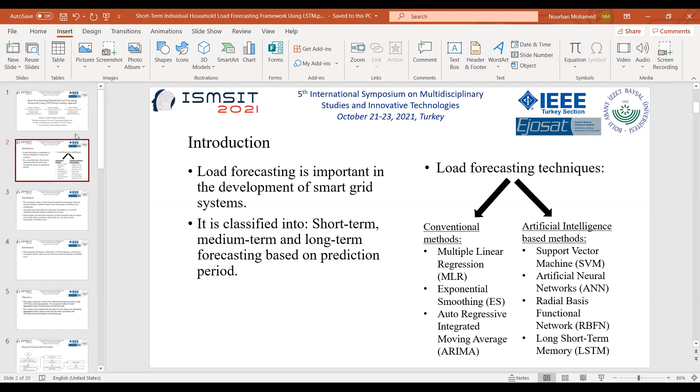Most of the methods mentioned before are used for forecasting aggregated loads at system level, but load forecasting at building level is a challenging point of research, as it requires forecasting unexpected consumption patterns due to the stochastic nature of single household consumption. Accurate load forecasting for individual customers is needed for intelligent demand response methods to be used. And with the development of smart meter technology, large amounts of high-resolution data on energy use at customer level will be available, which will help in more accurate load forecasting at building level.

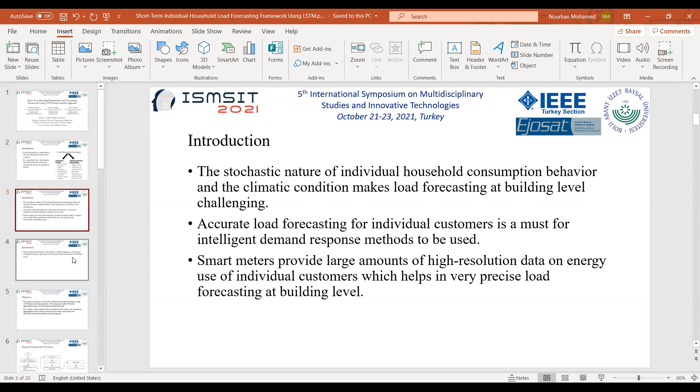Also, deep learning techniques, especially LSTM technique (long short-term memory technique), can produce acceptable results when used in short-term load forecasting at building level. So the objective of this paper is to propose a short-term load forecasting framework using LSTM deep learning approach; the model aims to achieve higher accuracy, and the model can feed both aggregated loads or individual household loads. Our model is then tested using two different time series, one representing the aggregated load at station level, and the other representing the individual household at building level.

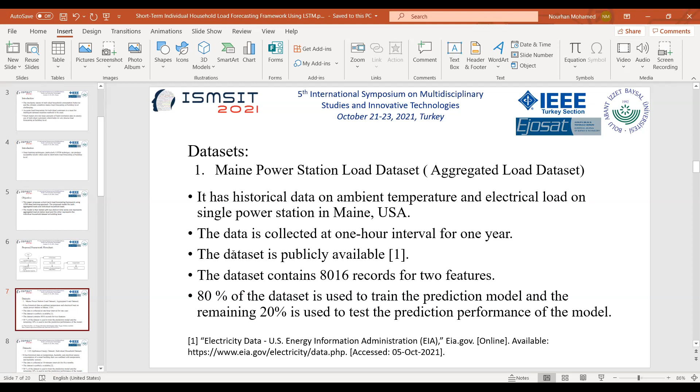The second dataset used is the UCI Appliances Energy Dataset, and it resembles the individual household dataset. The data collection took place in a smart building that was outfitted with temperature and humidity sensors. It has historical data on electrical energy consumption of smart buildings, temperature and humidity inside the building in different places, and temperature and humidity outside the building. The data is collected at 10 minute intervals for 5 months. This dataset has 19,735 records for 26 features. Also, this dataset is publicly available.

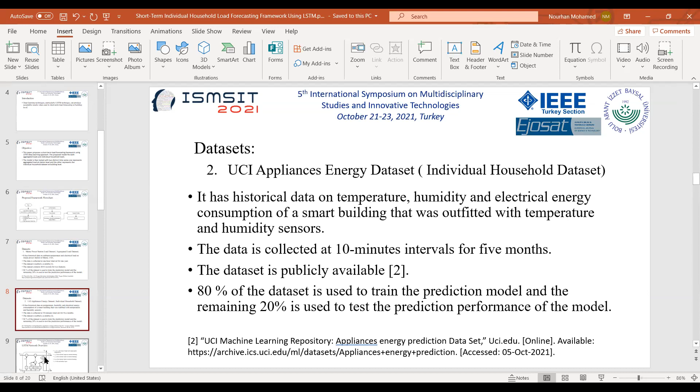As we mentioned before, we used an LSTM network for our model. LSTM is long short-term memory. It's an excellent variant of recurrent neural network. It solves the problem of short memory and difficult training of recurrent neural networks. It's very suitable for prediction of time series.

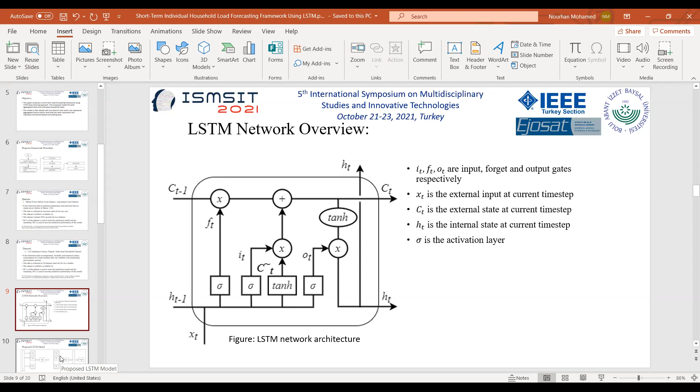So, LSTM recurrent neural network can control the retention and discarding of information transmitted in a neural network using the 3 gates as mentioned before. Determines how much of new state information at a certain moment or at the current time step needs to be stored in the memory unit. Compared with general neural networks, long short-term memory can learn dependencies with a relatively long span without the problem of gradient vanishing or gradient exploding.

The top LSTM layers output are inputs into a standard feed-forward neural network, which maps the intermediate LSTM outputs to forecast energy usage for the desired time period. To avoid overfitting of the model, the proposed model has a dropout layer after each LSTM layer.

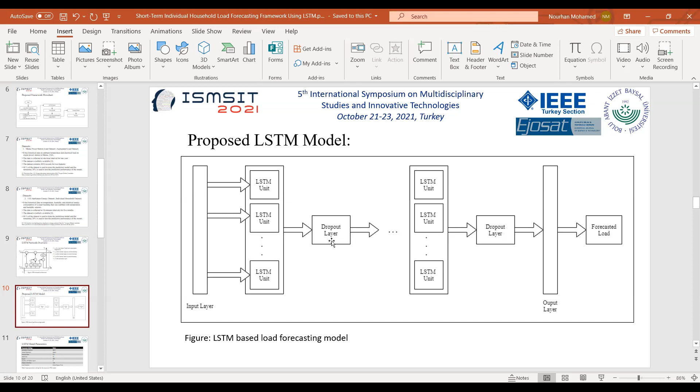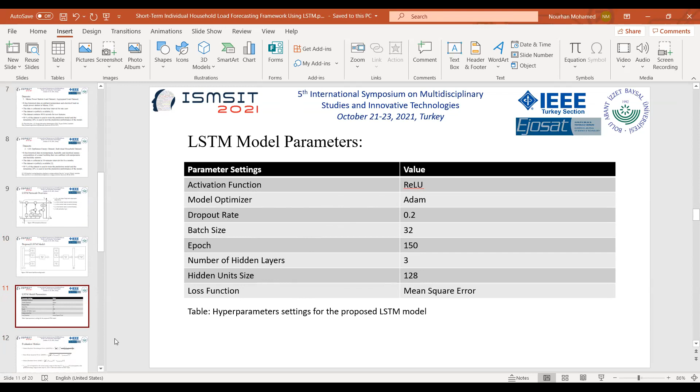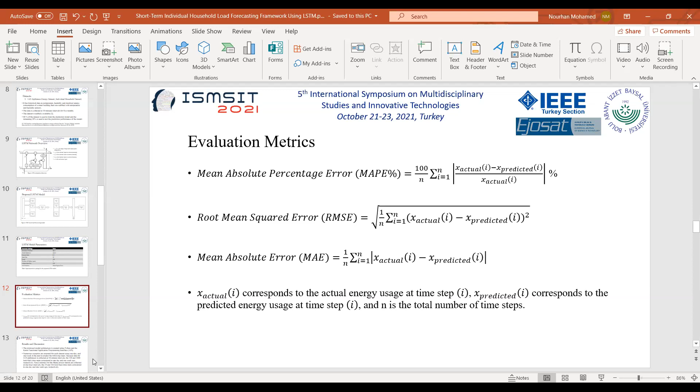Model evaluation, results and discussion. Our proposed model is implemented using Python and Keras library using Google Colab. Numerous scenarios are assessed for each dataset. We used 1 day look back and 1 week look back for each dataset to predict the following steps.

Because data of UCI appliances are collected at 10 minutes interval, 1 day resembles 144 time steps and 1 week resembles 1008 time steps. And for the main power station, it's collected at 1 hour intervals, so 1 day back resembles 24 time steps and 1 week back resembles 168 time steps.

For the second dataset that resembles aggregated load, 1 day back, it gives 3% MAPE, 2.5 RMSE, 2.122 MAE. 1 week back gives 2% MAPE, RMSE 2.2, and MAE 1.6. We can detect that forecasting loads at the aggregated system level is more accurate than forecasting loads at the house level due to the volatility of the individual household.

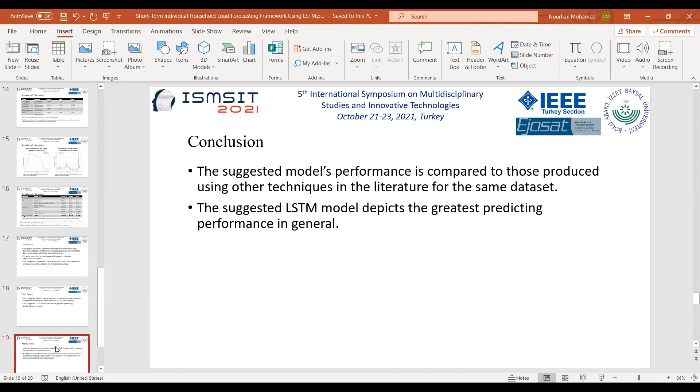For our future work, we suggest to utilize a hyperparameter optimization technique so we can enhance the proposed model performance. We can also combine the smart meter data and high accuracy individual household load forecast to investigate a novel framework for intelligent demand side management.

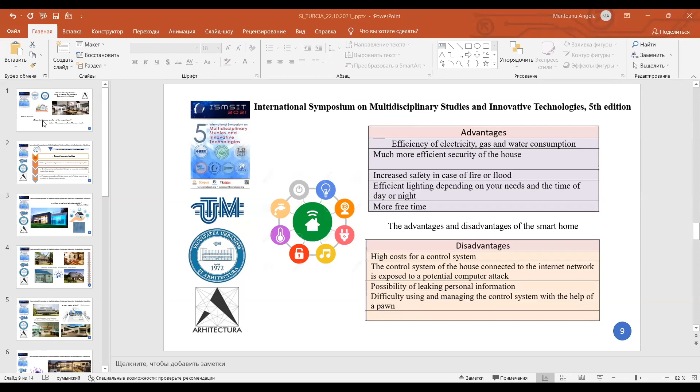I present to you the communication, the priorities and comfort of the smart home. This article contains a theoretical study which reflects the importance and priorities of smart homes in everyday life. There are some important priorities, such as the importance and priorities of smart homes in everyday life, a development in architectural design to promote comfortably controlled interior, efficient organization and control of living space, an ecological healthy environment.

In the smart home, the human, with the help of small impulses, can manage the systems inside and outside the building, even remotely, which will determine the individual needs of human, the current priority in architectural design. Today's architects and designers in the design of residential and public construction apply the principle of functionality, but also the thermal, sound, technical comfort, accessibility, and speed to services and information, all ensured by the automation of technologies in the home. The smart home is a system of devices in the house that can perform actions and solve certain tasks without the participation of a person.

The traditional Romanian houses of the peasants, the houses of our ancestors, classic houses, which were entirely made of simple but eco materials, differ from today's smart houses. Today they are successfully implemented in tourism, promoting culture, tradition, folklore, and national cuisine located in a local landscape. Today, traditional houses are complemented by intelligent systems.

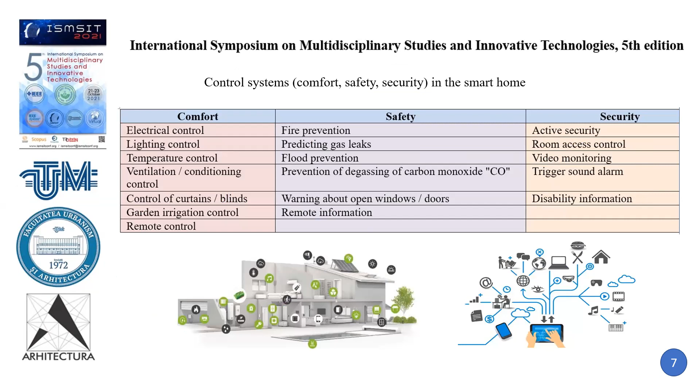The intelligent control system ensures safety, security, but also passive energy systems with the installation of thermal and photovoltaic panels, wind turbines of the beneficiaries depending on the package of services, today being suitable for private or office electric transport. Then the intelligent technologies provided by green electricity necessary for indoor comfort have a positive impact on the environment, as harness systems installed on the roof or facade of buildings, a current eco principle both for rural and urban areas.

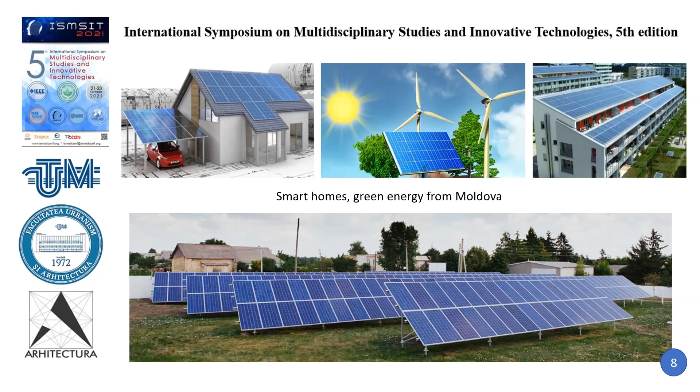The many advantages of a smart home are the simplicity and speed with which we can control or carry out certain household activities directly from our smartphone or other device. But many of those who want a smart home with a controlled system can face several obstacles: high prices, attacks and computer leaks, the difficulty of managing the system.

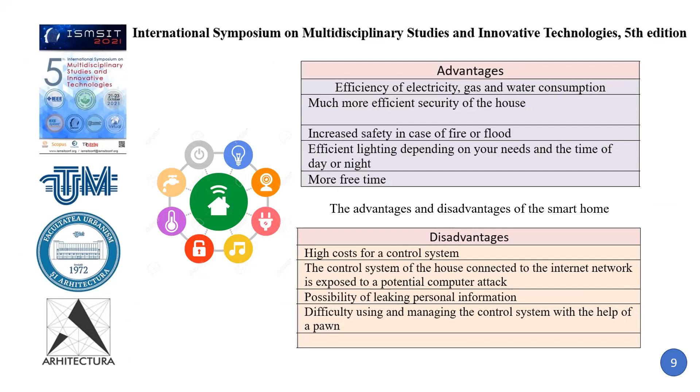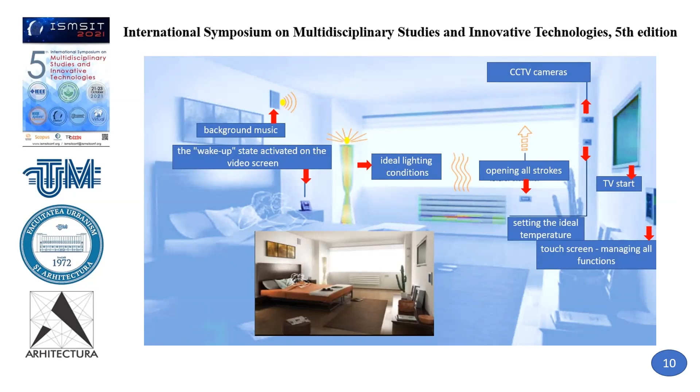In the smart home, the human, with the help of small impulses, can monitor the surrounding technique that will determine the daily needs of the individual, such as the system of regulation of heat and electricity, which brings benefit with large discounts on monthly bills. The ambience, the mood of the interiors can be changed by the colored lighting system. The play with the shape and size of the space changes by accentuating or diminishing some areas.

Smart home services in the Republic of Moldova. Today in the 21st century, to benefit from the services and opportunities of a truly automated smart home in the Republic of Moldova, we can turn to specialists in the field, companies that provide such services, meeting the consumer needs of the population for automated comfort in the house, which speeds up the development of science and technology, but is complicated by minimal services or expensive costs, which seems unfeasible for low-income Moldovans.

Therefore, in 2016, in Chișinău was launched a project in the field of the Internet of Things, the first housing block based on the smart house system in Moldova. The house system offers the inhabitants of the smart block the most modern level of services, as well as the possibility to use new tools for more efficient and convenient management of the houses, according to the latest trend in the field of information technologies and electronic communications.

Thus, the basic components of the smart home installed in each block, security, video, access control, lighting, automation, and telemetry, will make the operation of the complex safer and more energy efficient. With a simple touch on the smartphone, the user will control the light, temperature, doors, blinds or curtains, the video surveillance system, to be promptly informed about gas or water leaks, fire danger, or unsanctioned access to the house.

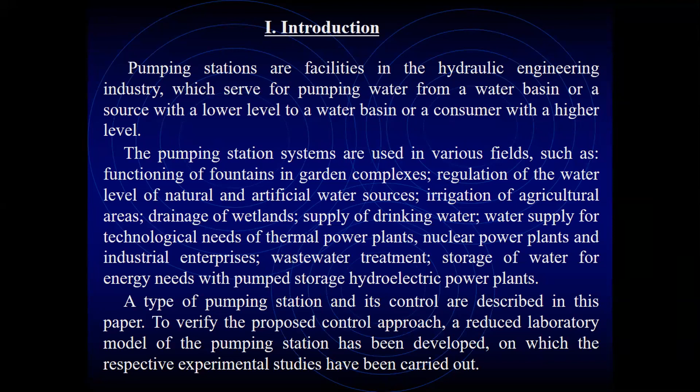To verify the proposed control approach, a reduced laboratory model of a pumping station has been developed on which the respective experimental studies have been carried out. The main purpose of the presented pumping station system is to control and maintain the water level in the respective reservoir by switching the pump in the pumping station. Figure 1 shows the basic components and indicators of the proposed technology group pumping station reservoir.

The operation principle can be described as follows. The pump pumps water to the reservoir and fills it with water, which is distributed depending on the needs. It is necessary for the level in the reservoir to vary within certain permissible limits so that there is no overflow and spillage of water, nor for the water level in the reservoir to fall below any technologically acceptable minimum. The purpose of the control system is to maintain an optimal water level in the reservoir by switching on and off the pump in the pumping station.

The pump aggregate can operate in automatic or manual mode. There is a switch on the control panel to select the operation mode, automatic or manual.

In the automatic mode, the pump is switched on automatically so that the level is maintained according to the task from 0 to 100%. In manual mode, the pump is switched on by the start button and stopped by the stop button. From the buttons, the pump speed can also be set when no operation mode is selected.

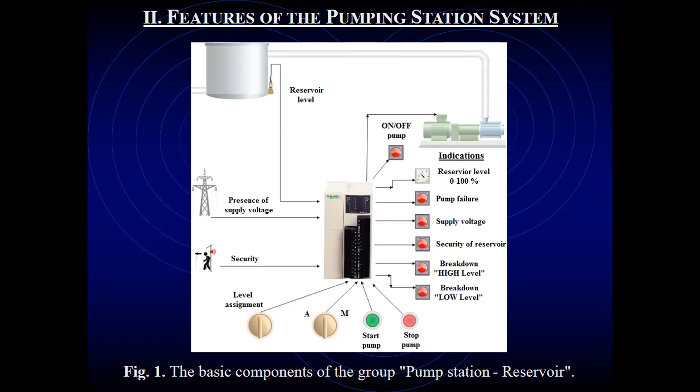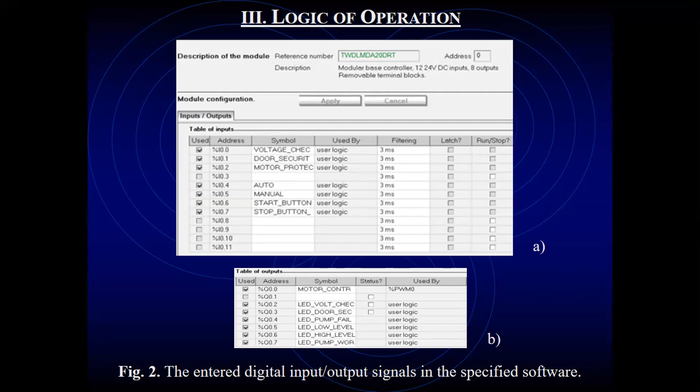In figure 2 are presented the entered digital signals in the specified software. In the next figures are shown some parts of the developed ladder logic for operation of the pumping station system. Figure 3 illustrates the automatic mode of operation. For activation of this regime, the following conditions must be fulfilled: checking the presence of voltage and checking the sensor door security. This sensor is mounted in the panel and controls whether the door is open, but can also be a signal from the reservoir room to monitor for unauthorized access.

Checking the status of motor protection, checking whether auto mode is selected, and checking the reservoir level in percent. If the value is less, operation is permitted. Figure 4 presents the manual mode of operation with the same principle of activation as in automatic mode. Digital outputs are configured in the following lines of the program, shown in figure 5.

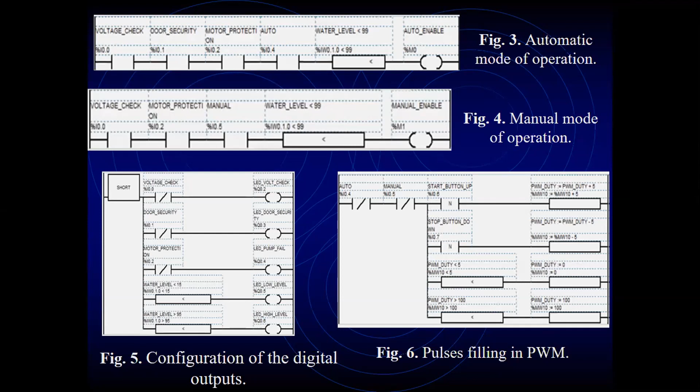Figure 6 shows pulse filling in PWM of the implemented DC motor of the pump station. If none of the modes is selected, the start pump and stop pump buttons change respectively to up and down. Each press of a button changes the filling of the pulse by plus 5% or minus 5%. A variable MW10 is written in a functional block. Figure 7 illustrates setting the hysteresis of pump operation.

On the basis of the implemented ladder logic, a reduced laboratory model has been developed for testing of the pump station system in different regimes of operation. This model is shown in figure 10. The small expansion contains the pumping station and a transparent PVC pipe is the reservoir. Next to the stand is placed the control panel to set both regimes, automatic or manual. The dashboard sets the water level in the reservoir, which must be maintained.

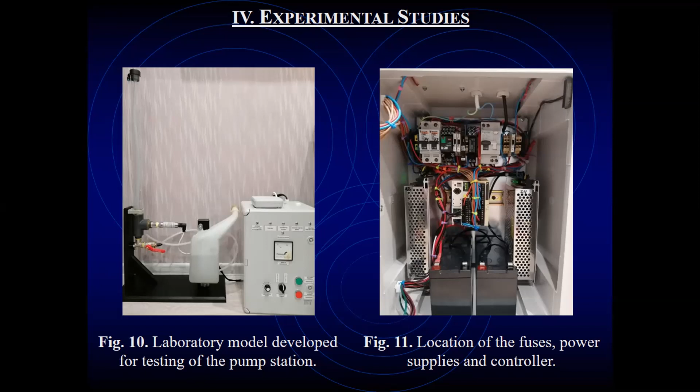The level, the status of the pump, works or does not work, and voltage control are also visualized. Figure 11 shows the dashboard containing the automatic fuse, power supplies, and controller. Figure 12 illustrates a scheme developed with a DC motor drive that is controlled by PWM control. The circuit is implemented with an optocoupler and transistor IRFP4229.

The outputs of a process module have a voltage of 24 volts, but with a small allowable output current. It is necessary to connect to the motor through a suitable electronic circuit to amplify the output current. The next figure demonstrates the experimental download process of a control from the output.

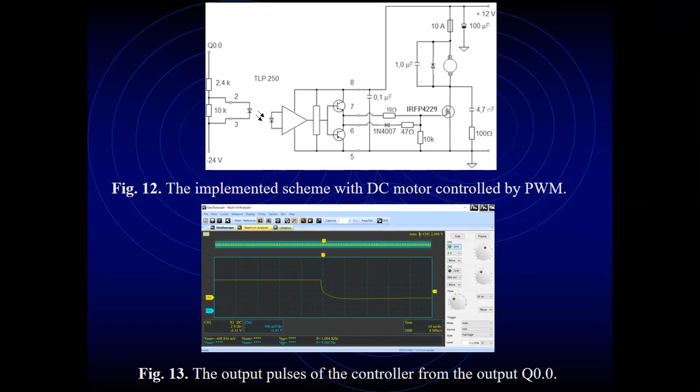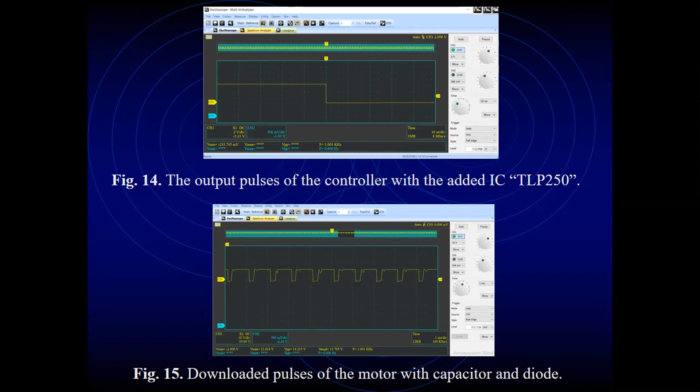The next figure presents an integrated circuit added to improve the performance of the developed circuits. Figure 15 shows impulses from the oscilloscope of the motor with capacitor and diode.

In conclusion, the main components and features of a pump station system are presented, and its principle of operation is described. Based on the formulated requirements, an appropriate programmable logic controller and electric drive are selected. The respective input and output signals used are described, and a control logic diagram is synthesized.

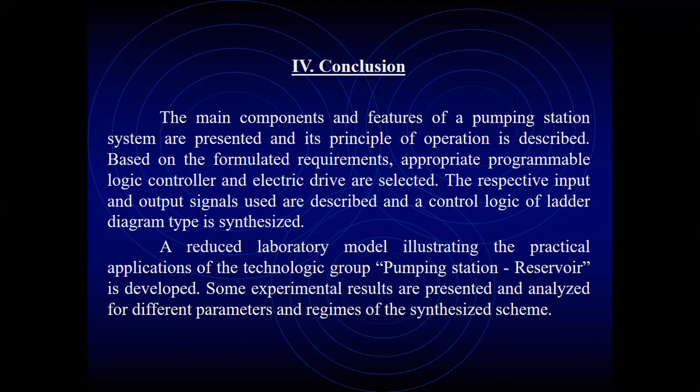A reduced laboratory model illustrating the practical application of the pumping station is developed. Some experimental results are presented and analyzed for different parameters and regimes of the synthesized scheme. Thank you for your attention.

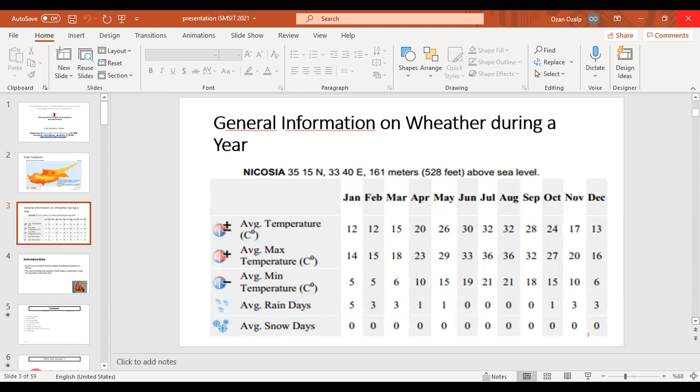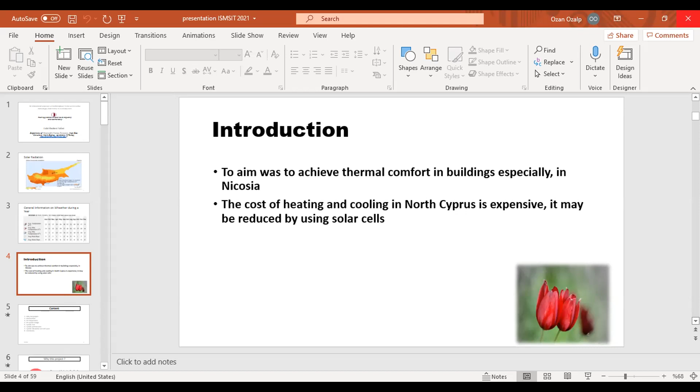Why do we use solar cells? Thermal comfort is very important in buildings. And the cost of electricity keeps increasing, so it is better to use renewable energy sources. I will cover the PV components, PV design, system cost, system performance, system simulation and software, and calculations.

We have 2 systems, on-grid and off-grid systems, but the off-grid system is very economical, and we check just off-grid systems. With on-grid systems, we can send to the network. But the off-grid system is very easy to use.

Why are solar cells better to use? Because the sun is a kind of renewable energy. Its lifetime is infinite, it's environmentally friendly, and it's very economical. And as the number of factories increases, it's better compared with previous years.

When you check it for Cyprus, generally it is now a new technology. We use solar cells in Cyprus, but this country has no petrol or coal. It is better to generally use wind energy or solar energy to produce electricity.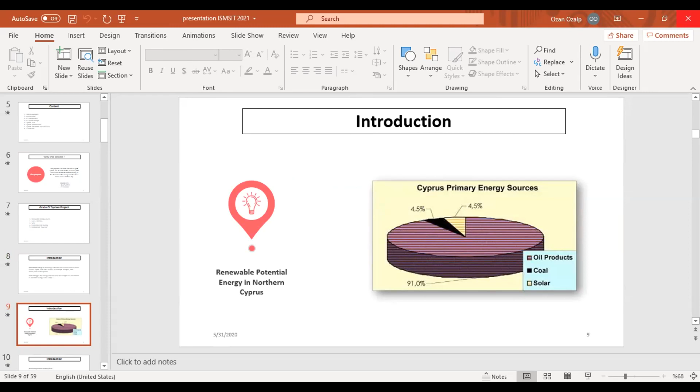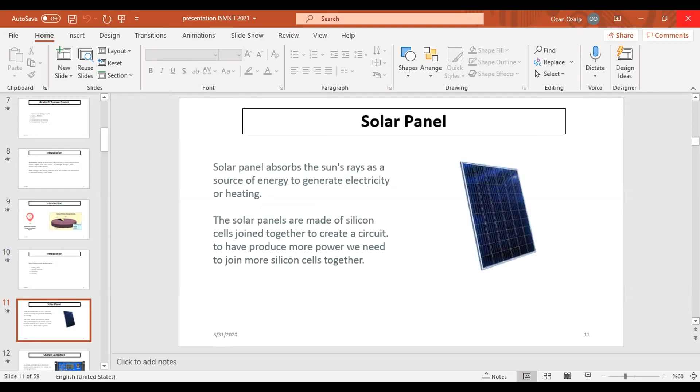What are the main components of PV systems? A solar panel, charge controller, inverter, and battery. This is a solar cell. It can have any size, and efficiency depends on the solar panel; it's not the same, it depends on the factory. For material, generally they use silicon and germanium. It's a semiconductor. This is a charge controller, to check the charge.

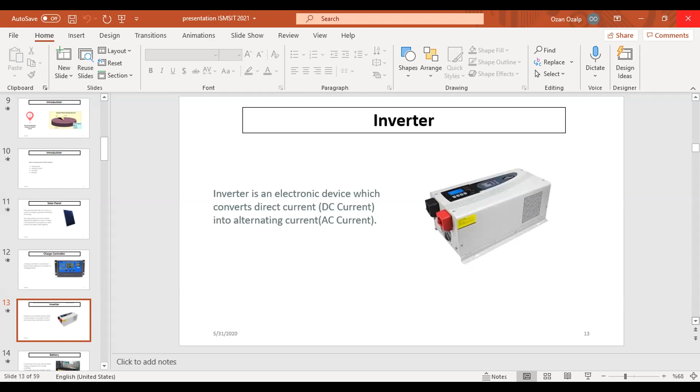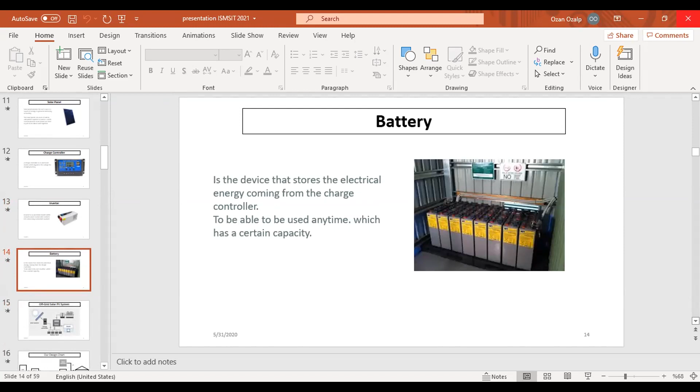Another one is the inverter, because after we produce electricity with the solar cell it is DC current, and we must change it to AC to use any devices in your house. Batteries are good for saving the energy after sunset, but we need extra space. If we have a chance to send to the network, it is better compared with storing it inside the battery.

This is an off-grid solar PV system, and they show the schematics here. You have a chance to save energy for after sunset. The battery is DC, then you send it to the inverter, change it to AC, and use it for your house.

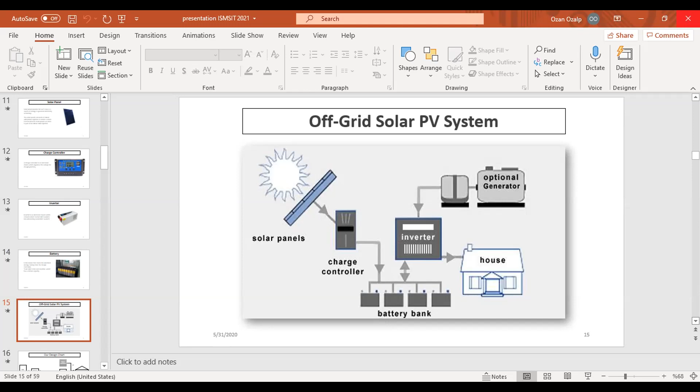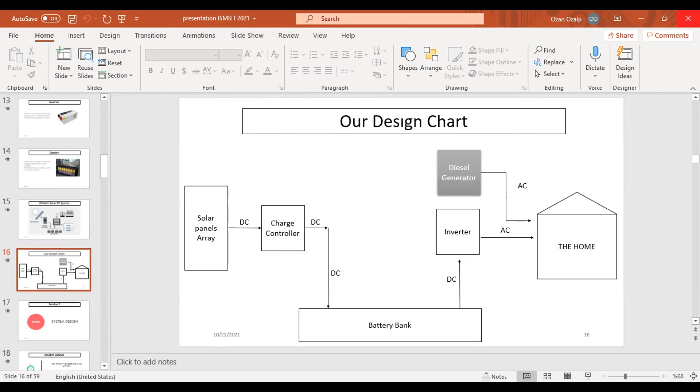Now, they show the design chart for the solar panels, the schematic of the design used to produce electricity. Second, the angle of the solar cell is very important. You can use calculations or equations to decide the theta angle, but it depends on the climate of your city.

We must check and calculate the best tilt angle for your climate. Here we check the main houses in Lefkosia, for example, houses that use light, TV, refrigerator, or water pumping. We look at the power and how many hours of operating time we have. Then we can directly calculate the energy: power multiplied by time.

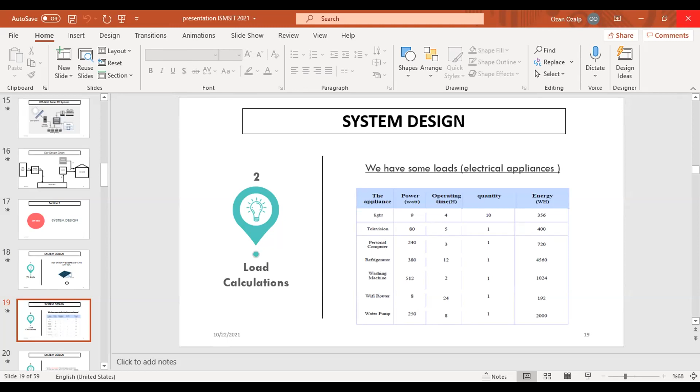They show for the small houses, for one house in Lefkosia, what is the total power. And again, about total energy, it is 9.255 kilowatt hour per day.

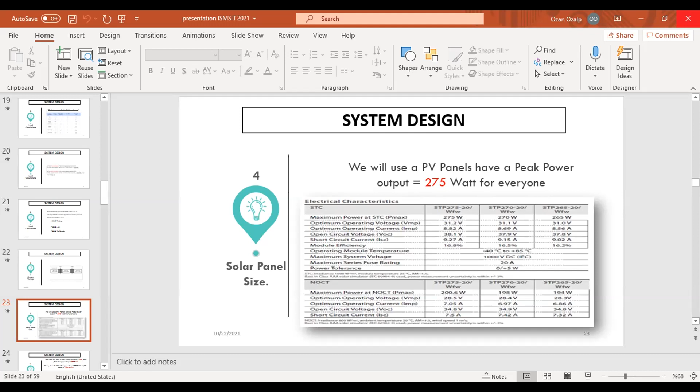But after that we have losses, from the solar panel size and the solar charge controller. When we calculate that, and we add it to the total energy per day, we can calculate the energy. After that, against panel generation factors, it's 77%.

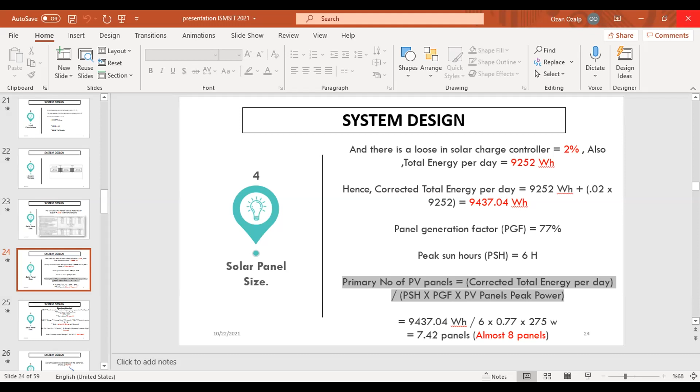After calculating all, we can find how many panels we need. We need 8 panels there, and 3 more, because from the table, 130 / 38.1, you can put it there.

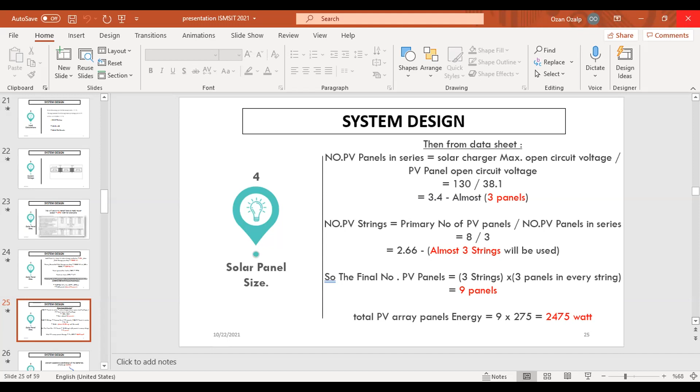But 3 strings multiplied by 3 panels in every string, we need what? 9 panels, okay? 9 panels multiplied by the watt for each panel, which is 275, you can calculate what is the power: 2,475 watts. This is for the charge controller.

And they give here the high efficiency. Now we have good charge controller efficiency, about 92 to 98%. It's very, very good when the efficiency is high. It's good for cold weather and cloudy or hazy days.

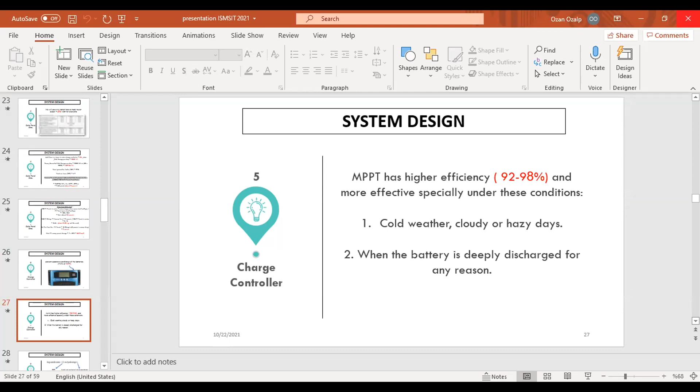And the batteries are deeply discharged for any reason. Then we can check the current, 33.37 for charge controller. And we decided we will use a solar charge controller of 35 ampere and 24 volt.

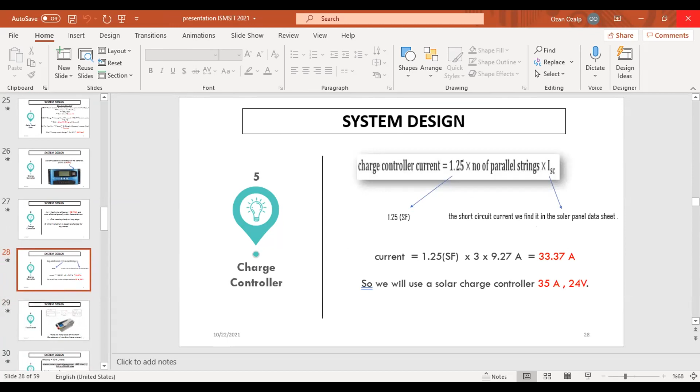For the inverter, we must decide before the design, for changing DC to AC. After that, for the inverter, if we check the efficiency, we accepted 90%. And we will find, it is better we choose a 2 kilowatt inverter.

And for battery banks, we can check, we have 2 types of solar batteries there. After checking the batteries, we know that about the energy consumption per day, 9,252 watt hour is the energy, and there are losses for the inverter, generally approximately 10%.

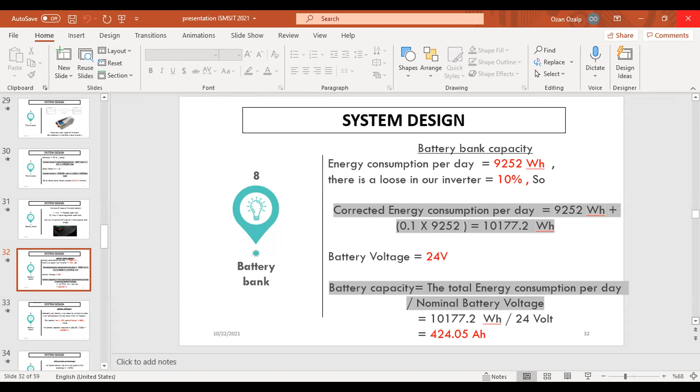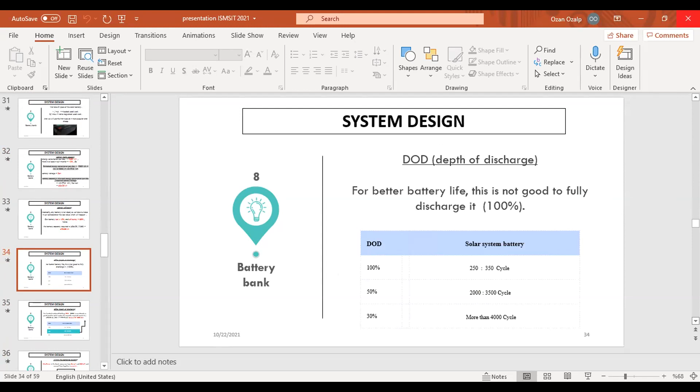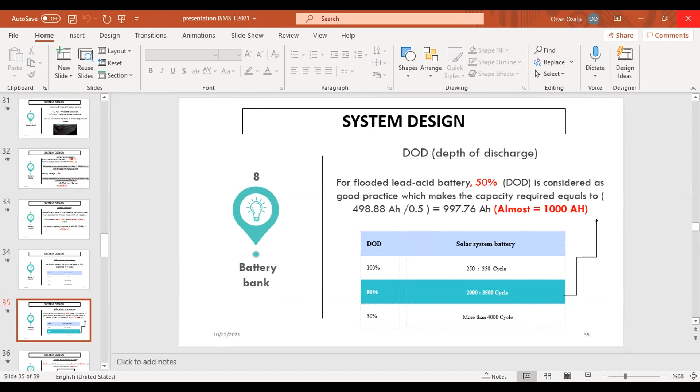And the battery capacity divided together, we can find 498.88 ampere hour. And they show here all the solar system batteries. Divided by, when it's 50%, what happens, you can find what is the 1,000 ampere hour after the calculations.

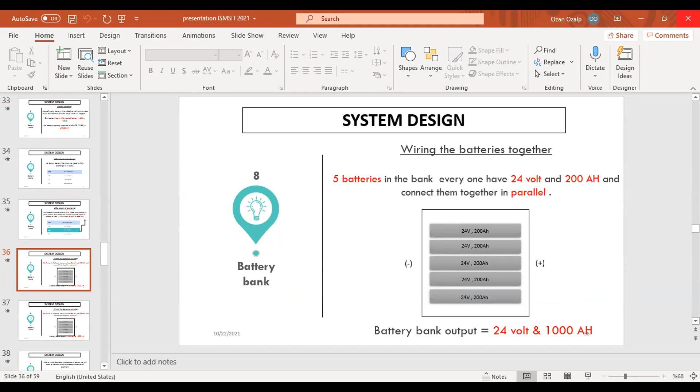We need 5 batteries in the bank, every one having 24 volt and 200 ampere hour, connected together in parallel. Battery bank output is 24 volt and 1,000 ampere hour.

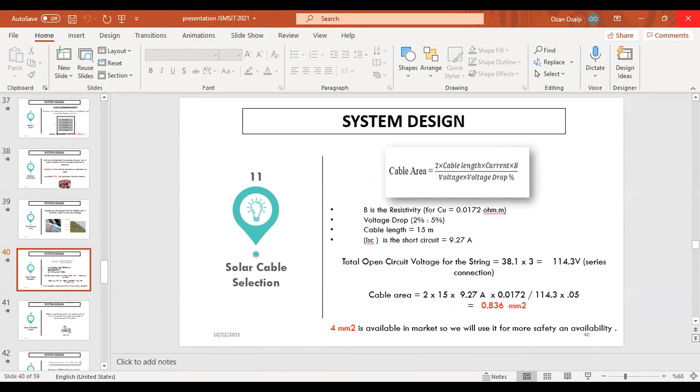And after finding the solar cable selections, we need 4 millimeter square, which is available in the market. We can find it in the market, okay? And the cable area is 0.836 millimeter square.

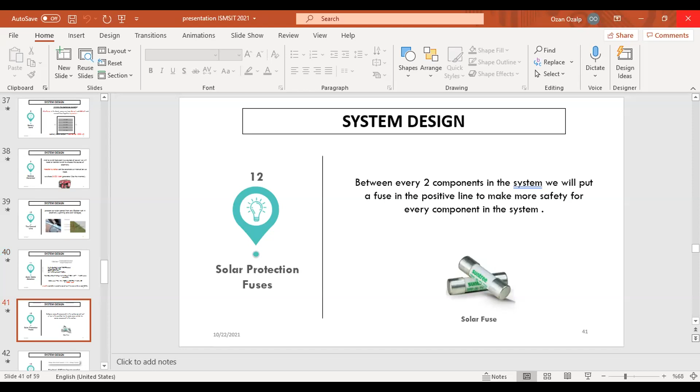And solar protection fuse, we need the fuse. After checking, the string fuse current is 40.46 ampere. We can choose the ampere accordingly.

When we check it there, we can check the payback period, cost over saving. And we know from before, we need the energy per day, okay, and it's changed to Turkish lira. And we can calculate energy over year, multiplied by 12 months.

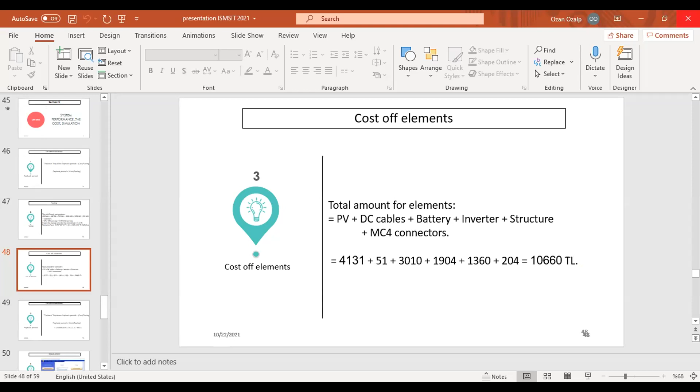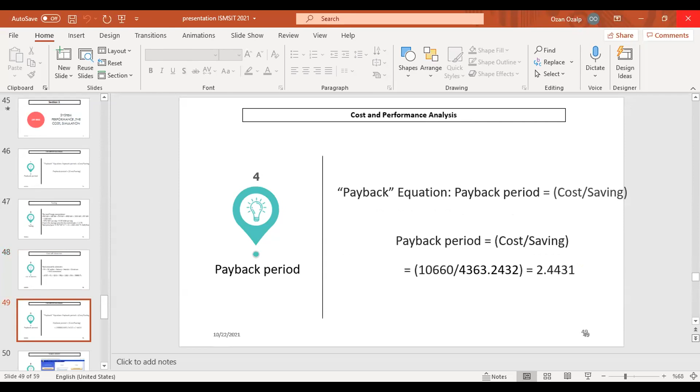And again, the total amount for the elements, we ask how much it is for each one. You can find the total in Turkish money. And the payback period is cost over savings, about 2.4.

Generally after 3 years, maximum 5 years, you have amortization if you want to use the solar cell, but this is dependent on the efficiency of the solar cell, and which factories, because the lifetime for the solar cell is generally 30 years, but batteries 10 years, for example. But it's not all the same, it's dependent on the kind of production. Maybe they write good efficiency, but after 5 or 6 years, it will be finished.

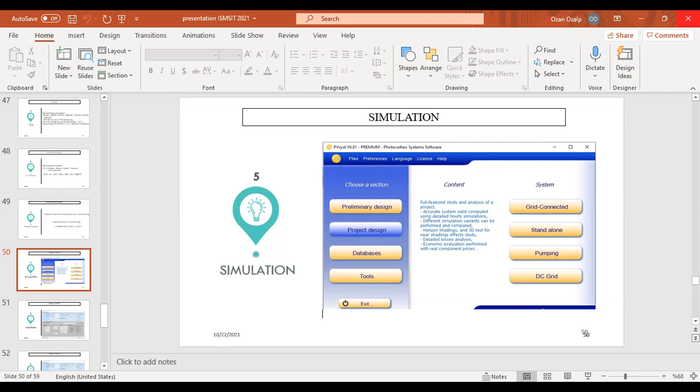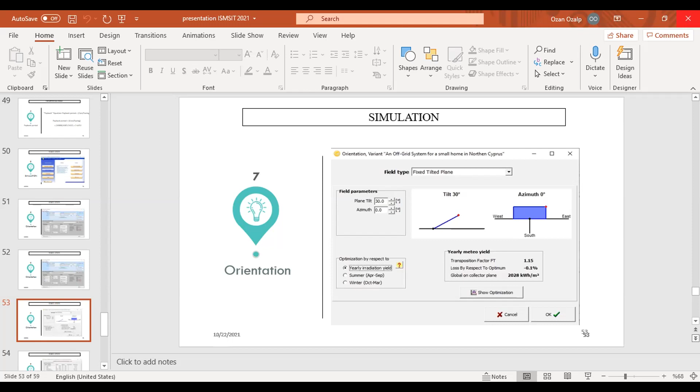Why? Because maybe if you want to check for the families inside, maybe they like, generally, for the buildings, cooling or heating. It's dependent, but it's a fix. Generally you can choose the near latitude data, and put any data inside the simulation.

You can calculate all during for Lefkoşa for one house, but you can write for all because you can change the angle inside, and you can find the best angle for Cyprus climate, Lefkoşa climate. But generally it's the same for Magosa or similar, just approximately the same data.

The PV panel is very good because we directly use renewable energy. You don't need to pay extra money to the government, no tax, nothing. But the first money is expensive. After that it's good. And these on-grid systems are perfect because you can use them directly for your house.

But the lifetime generally for batteries is not good. If you have a chance to send to the network, it's better. Thank you very much.

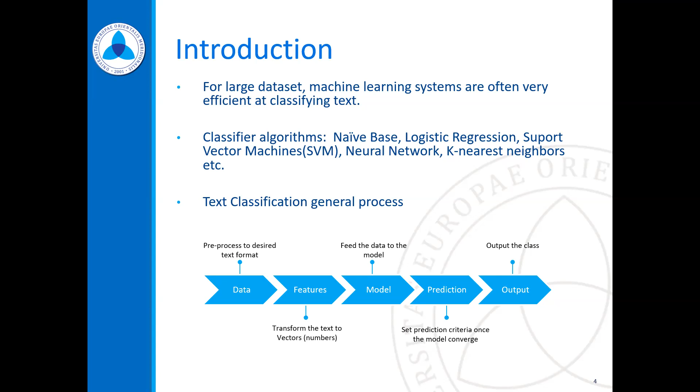The first process is to pre-process the text to the desired format. Next is to transform the text into vectors or numbers, then feed the data to the model. After that, set prediction criteria once the model converges, and finally we get the output of the class.

Here is our methodology. We aim to classify news articles into specific categories. We use a dataset from the Kaggle website.

Here is the link, and the dataset contains over 3 million news articles covering the period from 25 September 2007 through 27 August 2020, taken from these news pages: gazetaexpress.com, insajderi.com, gazetablic.com, ballkani.info, indeksonline.net, klankosova.tv, kallxo.com, lajmi.net, telegrafi.com, and kungulli.com.

The columns included in this dataset are the content of the article, date, title, category, author, and source.

From this dataset, we filtered and extracted the news from the year 2020 by the following categories: sport, technology, politics, lifestyle, health, fun, economy, region, entertainment, and world. The resulting dataset consists of 10,223 articles.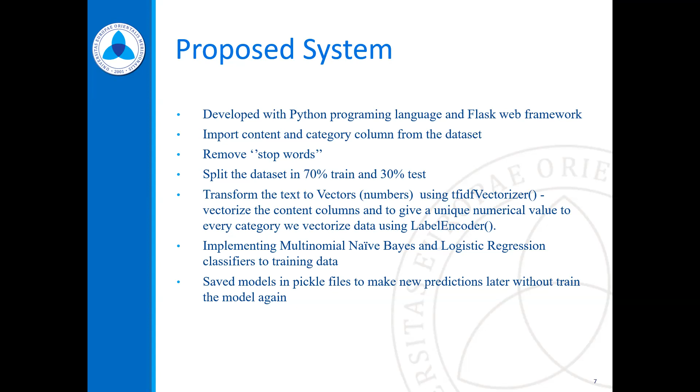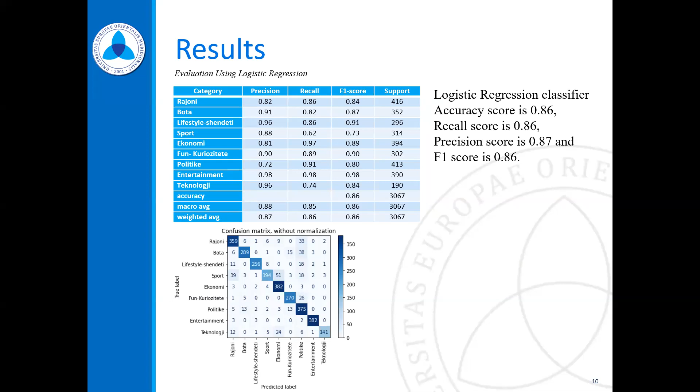In this figure, we show the matrix derived from the logistic regression classifier. From this matrix, we see the economy category has the highest classification, followed by the entertainment category, while the lowest classification belongs to the technology category.

Here we see the conclusion and future work. This system can be used to classify Albanian language news using the multinomial naive Bayes and logistic regression algorithms. The logistic regression model is more accurate than the naive Bayes multinomial model.

In the future, we plan to use other classification algorithms, and the entire classified Kosovo news article dataset will also be used to achieve the results. Thank you for listening to my presentation.

Any question? Any question? Comments or remarks? No question. Can I present next? Right, right.

If it's possible, I want to start this presentation, but I recorded the audio for this presentation.

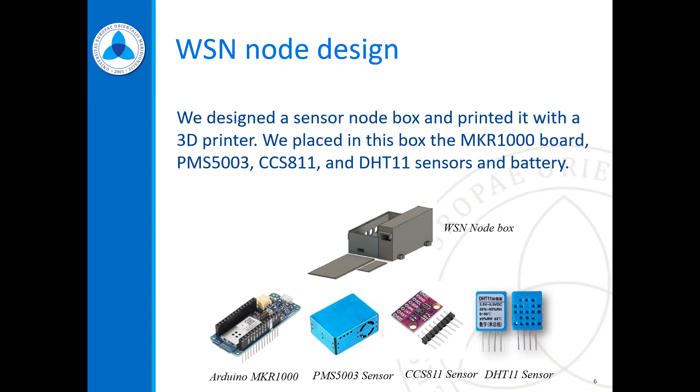Table reports the data of our study. The descriptive statistics, minimum, maximum, mean, and standard deviation values are used. In total, we have collected 18,608 observations for a 14-day period. In this table, we show minimum, maximum, mean, and standard deviation for temperature, humidity, particulate matter 2.5, particulate matter 10, carbon dioxide and total volatile organic compounds.

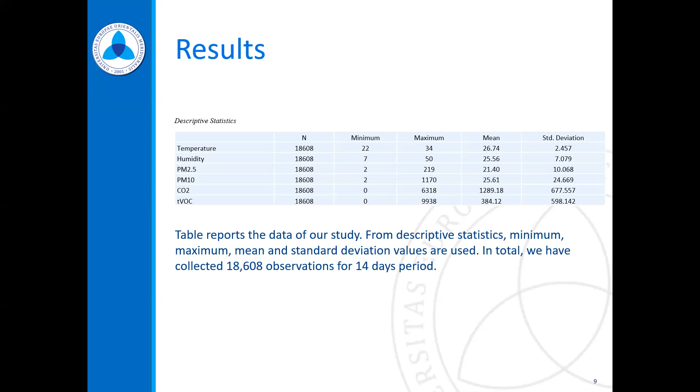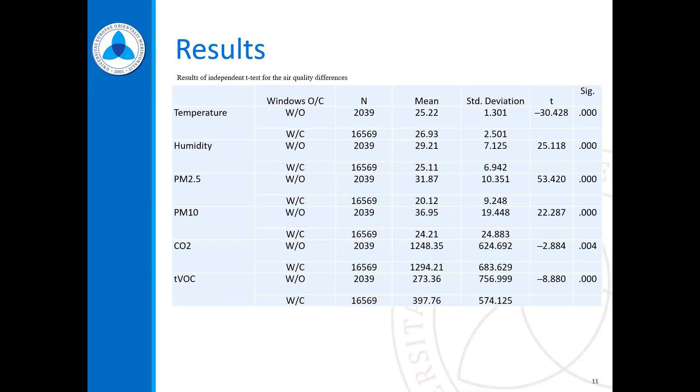The results show that our system can be used for indoor air quality monitoring and is low cost and low energy consumption. Descriptive statistics show that the indoor air quality has been very poor in the gymnasium during these 14 days, according to intervals suggested by the Institute. When students are in the classroom, they open the window, and in the classroom there is a high level of fine particulate which is mainly introduced indoors by highly diluted outside air.

When students are not in the classroom, the windows are closed, and in the classroom there is a high level of carbon dioxide due to the accumulation in the classroom and inadequate ventilation. As expected, the temperature level is higher when windows are closed. The humidity level was higher when students were at school because they opened the window and fresh air was present inside. The level of carbon dioxide has been lower when students were at school.

This means that carbon dioxide has been filtered out when windows have been opened and indoor air quality has increased during this time. The total volatile organic compounds have also been lower when windows have been opened. We recommend that the school use ventilation to keep fresh air to help students perform better in class. As future work, we will look at the school documentation: how many students are sick in this class during this year being affected by polluted air?